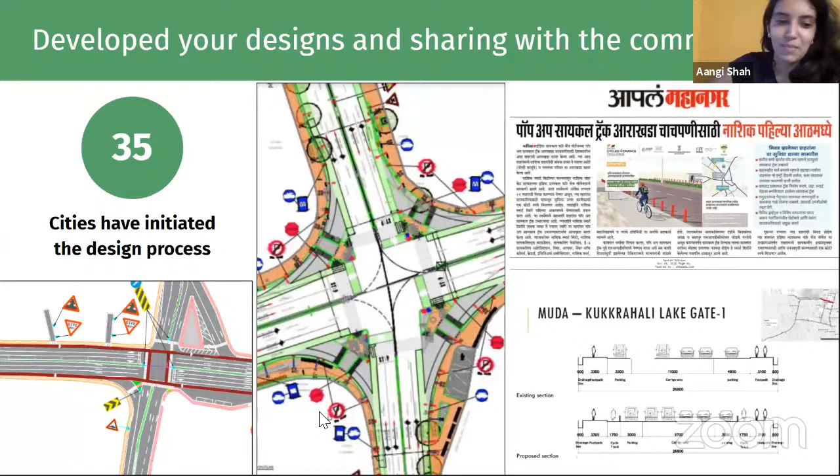As cities have also completed their handlebar surveys, they have started to develop their designs. We've seen over 35 cities have already initiated their design process. We've hosted design discussions with many of you, and we love the rigor with which you are taking these designs forward and testing them on the ground. 15 cities have started the exciting process of testing these designs on the ground. Here we're seeing Pimpri Chinchwad, Aurangabad, photographs from Nashik, Chandigarh, and you're also including a lot of citizen engagement initiatives to get feedback on how users are using these designs. Kudos to all of these cities for doing such a fantastic job.

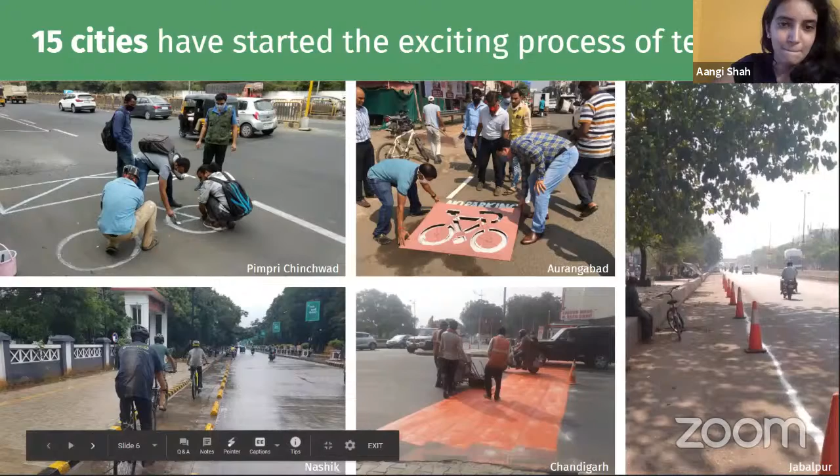And of course, cities have also continued to build momentum through cycle rallies, cyclothons, like you're seeing in the photographs on this slide, and cycle maintenance workshops, and also online workshops and webinars and much more.

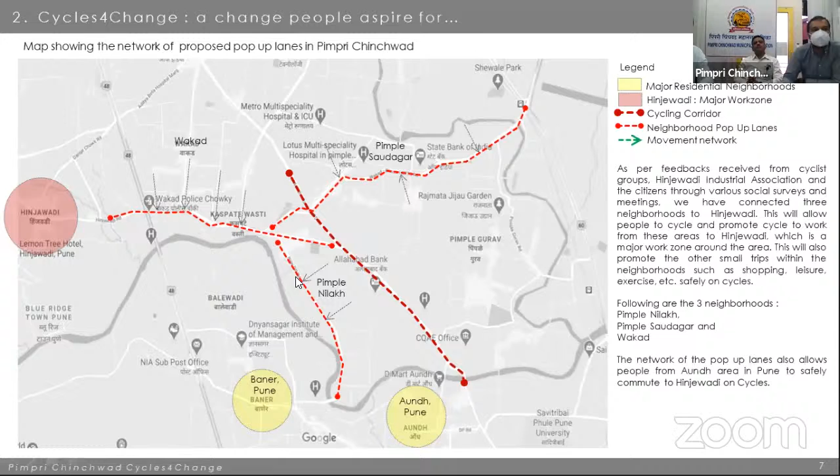For the neighborhood streets, we had discussions with a lot of stakeholders in the city. Based on these discussions, 3 roads were identified as neighborhood streets, covering 3 major important areas of the city: Pimple Saudagar, Pimple Nilakh, and Wakad.

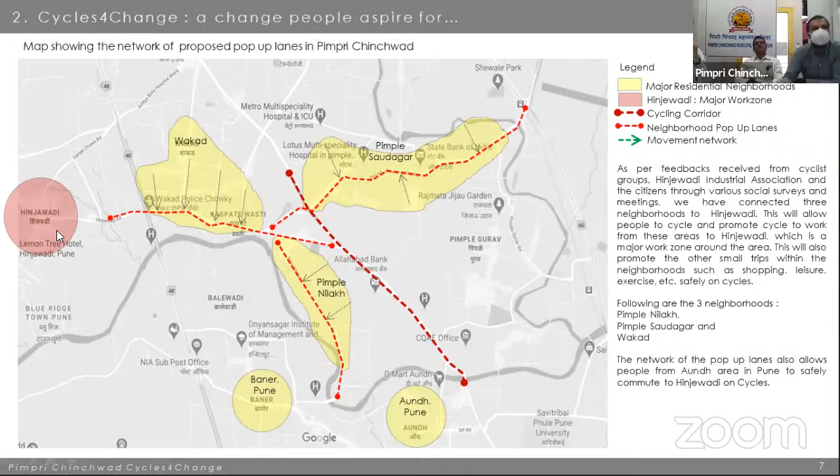The idea of selecting these streets as neighborhood streets and this particular corridor was to connect all these residential areas around Baner in Pune, Pimple Nilakh, Pimple Saudagar, and Wakad to a major industrial area and IT hub of the city, which is Hinjewadi.

So these are the different streets. This is the main pilot corridor, and these are the 3 neighborhood streets. The cumulative length of all these streets is around 17 kilometers, and with cycle tracks on both sides, including pop-up lanes, the total length of the bicycle tracks will be around 34 kilometers. We came up with different strategies for different roads, like painted plus segregated, or just painted where the road width is limited.

We also conducted a handlebar survey. 25 people participated, divided into 5 groups of 5 persons each, and they took rides on 5 different stretches of the city. We came up with different pain points for those streets and categorized the issues into 4 categories.

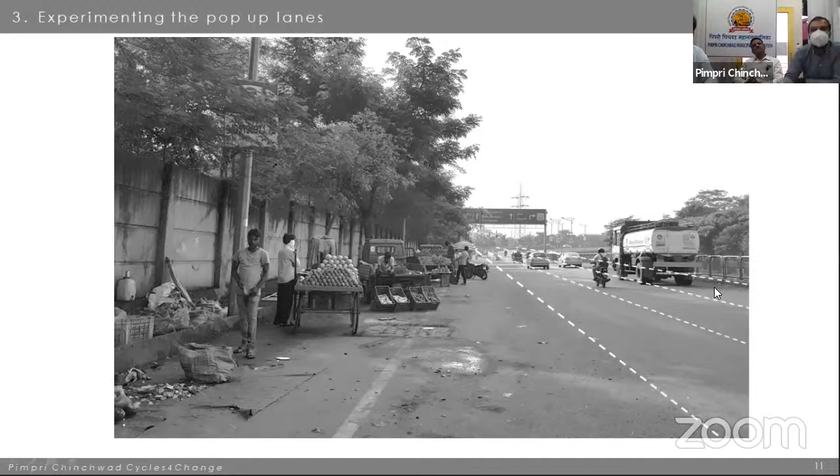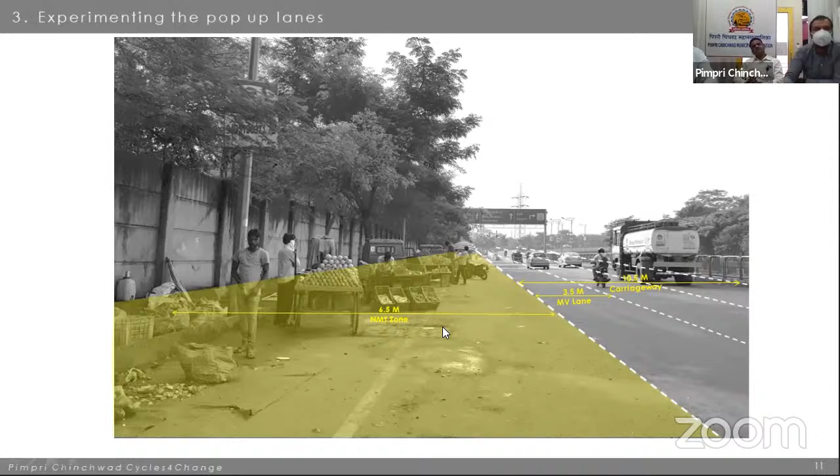After that, we had 3 lanes of carriageway or motor vehicle lanes, and the remaining width, which fluctuates between 2 to 6.5 meters, we called the NMT zone. We were very skeptical, so we did not call it a cycle zone or pedestrian zone, just the NMT zone. There were a few activities in the NMT zone that needed to be taken care of, and these were the drawings we produced.

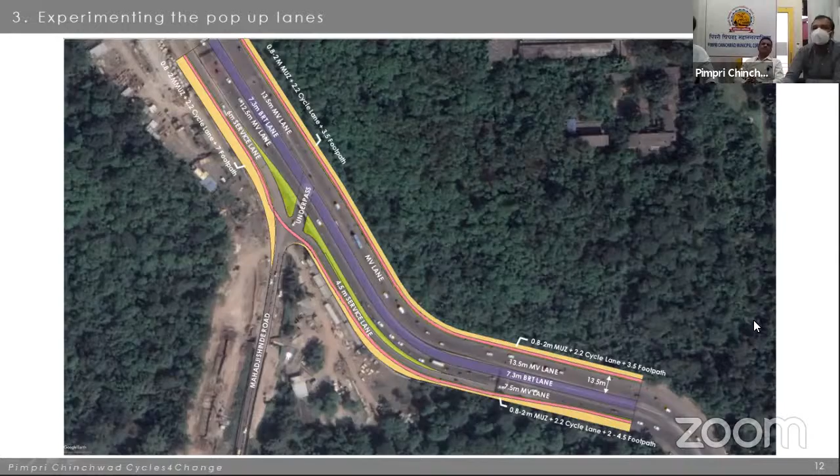Everywhere, we segregated the NMT zone into 3 parts: the multi-utility zone, ranging between 0.8 to 2 meters; the cycle lane, a pop-up cycle lane, around 2.2 meters; and a footpath varying between 2 to 4.5 meters. That was the basic strategy, and we came up with these drawings.

The basic items we considered for this intervention of pop-up lanes were traffic cones, a few planters, and cycle parking wherever required. Along with that, we also had other BOQ items like thermoplastic paint and cat's eye reflectors to ensure the safety of the cyclist.

After that, we came up with 3 zones: the multi-utility zone, which could cater to activities happening on the streets, like street vendors, and seating space if required in the future. So you actually plan everything beforehand, that was the strategy.

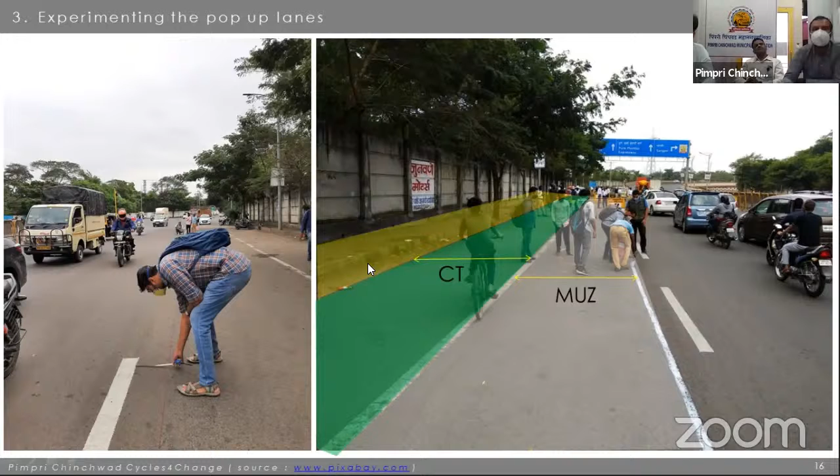Then the cycle track, a clear cycle track around 2.2 meters, and the pedestrian footpath, wide enough so people can comfortably and safely walk. After that, the width of the NMT zone kept fluctuating, and a lot of people started calling us asking why the width was fluctuating.

So this is just to demonstrate a small stretch. The entire stretch of road was around 4 kilometers, and including NMT zones on both sides, it was 8 kilometers. So we selected a 2-kilometer patch on that road and started defining these three zones within the NMT zone: the multi-utility zone, the cycle lanes, and the pedestrian lanes. Irfan, my colleague, will continue now.

Hello everybody, this is Irfan from New Era Infotech. We got associated with PCMC to promote cycling. The project we came up with PCMC is Go Green Go Cycling, an ecosystem to cultivate cycling culture across cities, keeping cyclists at the core.

What we realized initially when working with the corporation was that people weren't really comfortable taking up cycling. So we thought of taking a survey. We took a survey individually from our end of around 1,800 people, and this is how we came up with some points.

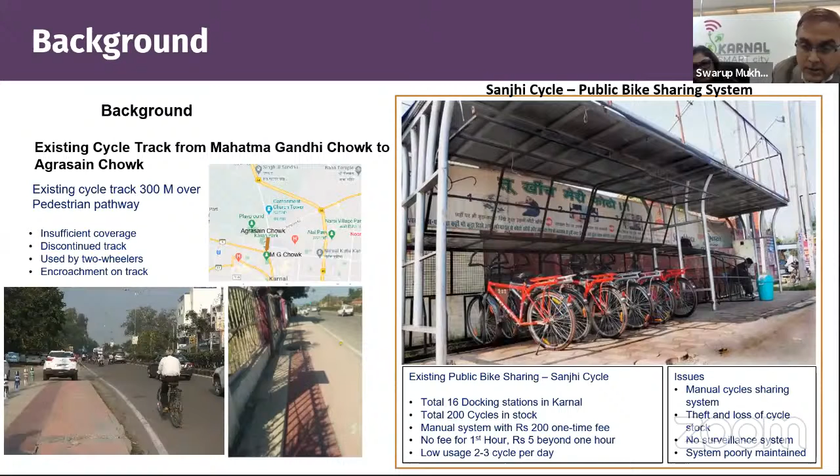After judging all the enthusiasm of the people and the supportive administration of Karnal, we managed to initiate another fresh trial on a major road called the Baldi Road from Agrasain Chowk to Gitadwar. It's a stretch of around 2 kilometers, a well-done, recently developed 6-lane divided highway with a 2-meter paved shoulder on both sides.

It's not us only, with the contribution from the social civic societies and associations, the Municipal Corporation of Karnal, district administration, and most importantly the Karnal Randonneurs and the Royal Cycling Club of Karnal - their representatives all together made a representation to our administration. With the help of our DC sir and the Superintendent of Police of Karnal, we successfully closed down this major road because the traffic volume is not as high as it has to be for a 6-lane road.

Inside the city, it's around 22,000 PCU per day annual average daily traffic, which is very low for a 6-lane road. So what we did is close one side of the road during two time windows: in the morning from 5:30 to 7:30, and in the evening from 5:30 to 7:30. People are spontaneously using this road still today for cycling and walking purposes.

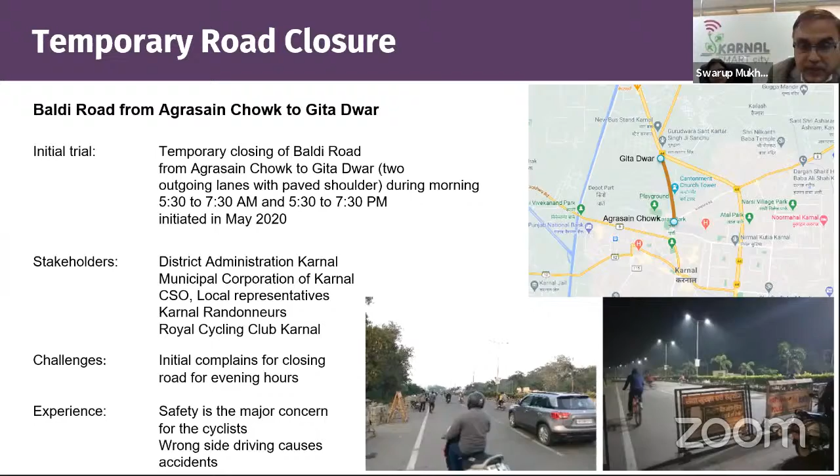So these are the major points, the major issues that we faced with the discussion with the end users. This is the picture of the stretch that I'm talking about - a 2-kilometer stretch.

It shows here there is a temporary barricade put at the entry of this road. However, the other side of the road, which is 3-lane plus paved shoulder, effectively has 4 lanes on the other side, so police used to control the traffic, both two-way traffic, on the other side of the road. The traffic movement is still there, but today at 7 o'clock, this is the scene there.

Most of the people, young people, are using this as a cycle lane, and old age people are using it as a walking area. The major point here is, again, they are very happy because it's safe. There is no traffic, no other disturbance.

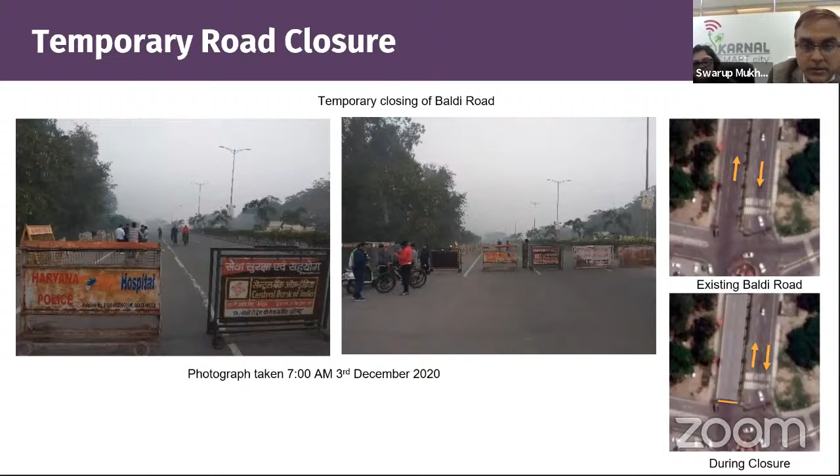So getting a cue from this trial that we have done here, we formulated a project on this same road, Baldi Bypass, 2 kilometers. It is a combination of a cultural street along with a cycle track.

Right now, if you see the lower bottom left picture, that is the existing site - the footpath and a paved shoulder here. What we proposed here, and at the end of this stretch there is Srimad Bhagavad Gita Dwar, which connects the theme of Karnal with Kurukshetra and the basic idea of the land of Karan - those things are a kind of theme for that road. So it's already there, and we created a cultural corridor here.

What we did exactly is fencing the wall - the existing wall is like a barbed fence there. The other side of the road is forest land, so we cannot construct anything there. So we are redoing the barbed wire into a chain link fencing, and with this chain link fencing, we will be having a green cover with creeper plantation there.

And in 6 or 7, 8 locations, we'll have a plain wall for around 20-meter long, where we will use the surface for a thematic drawing based on Karnal, based on Mahabharata, Karan, those things. And at the same time, we'll use the paved shoulder part as a cycle track, which is an NMT lane. We can call it NMT lane.

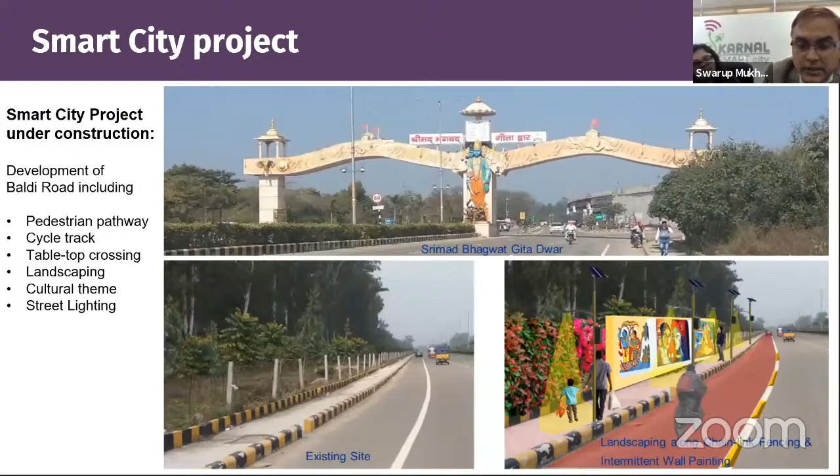Yeah, sure. In the same way, we also had a detailed survey of the entire city, all the roads, what are the traffic levels, and also the number of cycles moving. Here, there are 2 types of cyclists: we have recreational cyclists who are going for fitness and all, and the other one is cyclists who are going from home to work. If you consider their numbers, they are significant, 2,000 to 2,500 cycles are there in the major streets that we found out throughout the city.

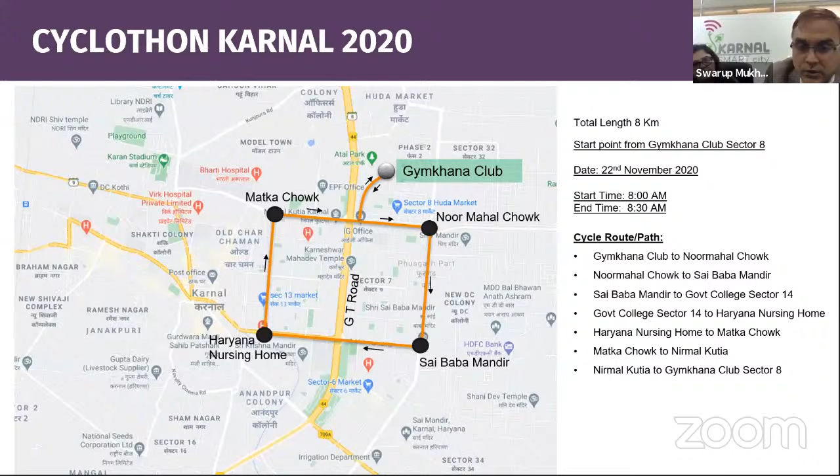Then from that, with the help of local consultation, the area we cover is mostly residential. We are touching the colleges, the student community, we're touching the schools and offices, office complexes. Then we formulated this square network, which is covering both parts of the city, both sides of National Highway 44. In line with that, we also conducted Cyclothon 2020 through this same route, where we are proposing a cycle track in coming days.

We are going to propose that cycle track there also, using the paved shoulder area, the same way that we have done in Baldi bypass. This is a picture of the cyclothon that we recently conducted in the month of November. It was attended by more than 250 people of all different age groups, from the student community, from coaching, and professional cyclists staying here in Karnal. So we had a very good response from the people.

We are hoping that we will be able to manage to actually implement around a total of 15 kilometers of cycle track in the city. Thank you very much.

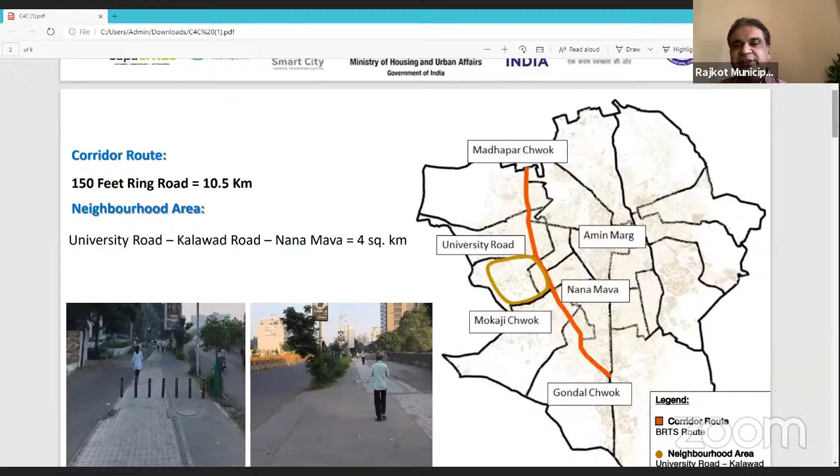We made an investment in a cycle track way back in 2012, a 10.5 into 2 kilometer stretch. But somehow the cycle track was never used. In fact, the BRTS corridor was much more successful with very high ridership. We also had very good transit-oriented development along the BRTS track, but the cycle track never developed.

We even tried to do a couple of cyclothon events, and each event had participation of more than 2,000 people for 4 to 5 years. But still, that did not make cyclists use this infrastructure.

We again started a very rudimentary cycle sharing project way back in 2015. It was a very modest in-house app with a few bicycles. People were using those bicycles, but only for hygiene, meaning health, not for commuting to work.

So probably this whole infrastructure was waiting for some catalyst, and probably Cycles4Change again gave us that opportunity to rejuvenate the investment.

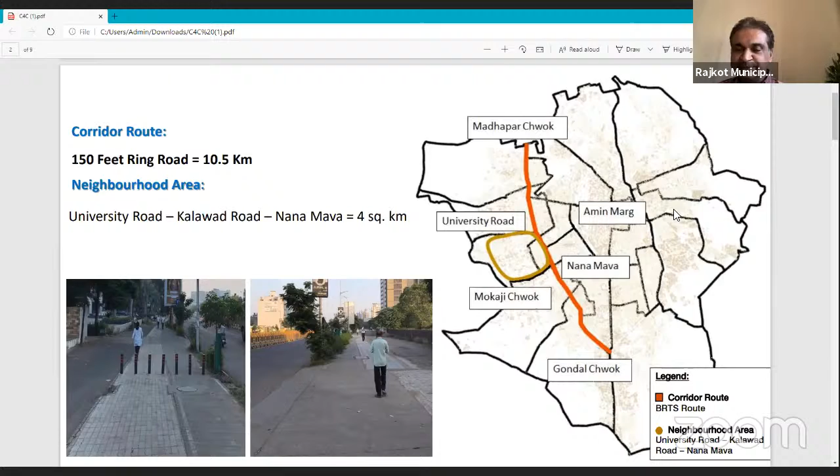So this is the corridor. We had a handlebar survey. I'll keep it very brief - all cities have done it, we know it well.

Just to add enthusiasm to the cyclists, the commissioner, myself, the CEO, and other deputy commissioners all joined the handlebar surveys, not once but many times, and we identified issues which are very well known throughout the country: encroachments, low visibility, poor lighting, crossings, cars being parked on the track - all those things. So enforcement was a major issue.

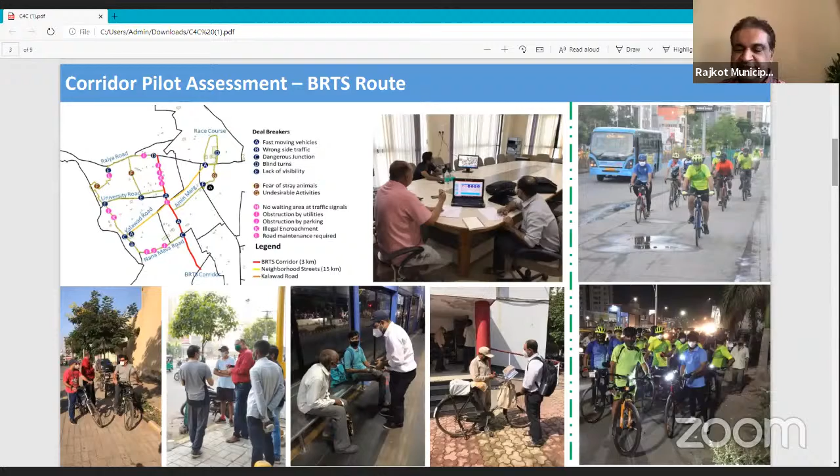Again, this is a bit scientific - we had a priority of actions where we identified which parts needed more stringent action, but this is just for internal purpose.

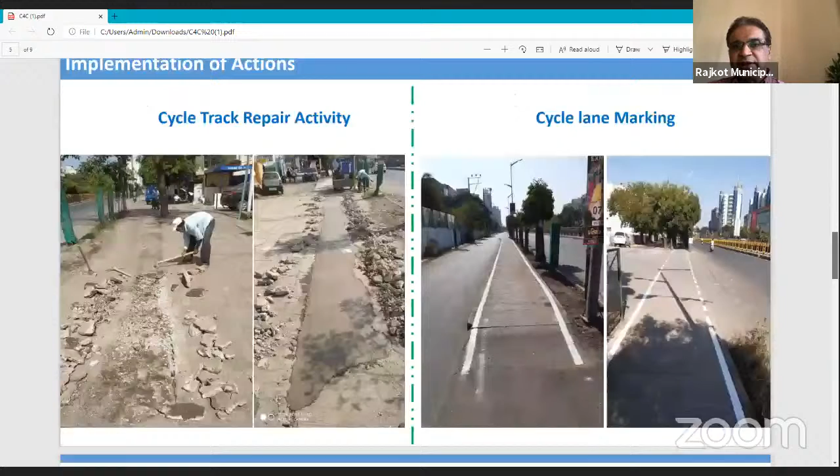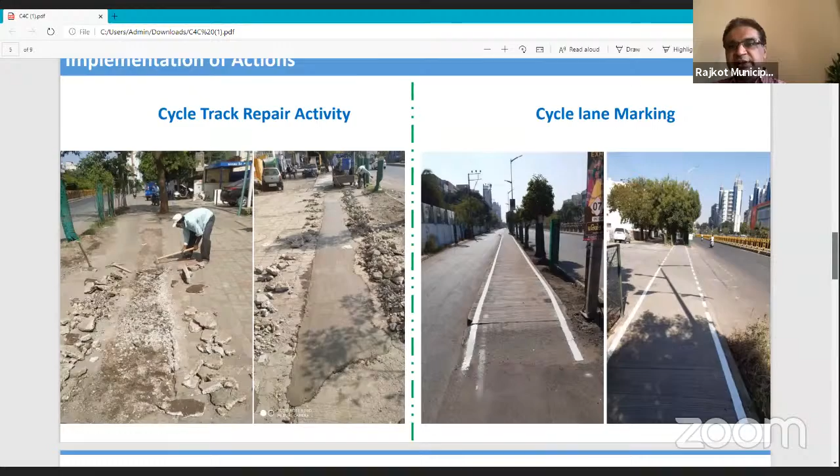Again, cycle track repair activity and cycle lane marking, we are doing just like other cities, so for the sake of brevity I'll not repeat it. Tree maintenance and unauthorized parking, again for the sake of brevity, I'll not repeat it.

What we needed was some catalyst to really increase the use of bicycles in the city. The ownership of bicycles was rising, but they were not being used for commuting to work. So we decided that the municipal corporation will cycle to work every Friday. Since 7 weeks we have been doing this, and this will be the 8th week.

We requested all the big establishments along the proposed cycling corridor to join us for cycle to work on Friday. Apart from that, we even urged other citizens to cycle to work from wherever they are and wherever they work, every Friday.

Initially, our response was excellent. First week, second week, third week, it was great. But again, we understood that it started declining. First week, we were more than 500 riders. Then second week, it went down to say 300. Third week, it went to 100.

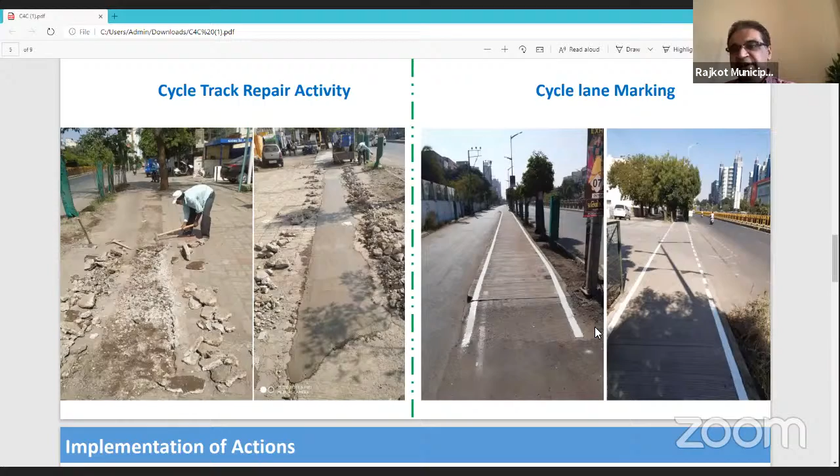Again, we found that the plantations we had made were really cutting the vision, making it very unsafe. In fact, we never realized it unless we rode ourselves. It was a very simple task to trim down the trees, but it was very important.

So cutting down the trees, ensuring there are no potholes, ensuring there are enough lights. A few of the crossings were encroached, used by vendors and tea shops, and we found women were not using them because of the vendors and crowds. So we had a very heavy dose of enforcement to ensure all those junctions and crossings were freed of encroachments, just to ensure that women riders venturing for the first time, or already using it, would find it safe and dependable.

Sure, sir, thank you so much for that. Because as much as we want to encourage cycling, it's also important to see who might not be cycling right now or might be cycling less—for example, women or children—and how we can put the spotlight on them, identify their issues, and then resolve them.

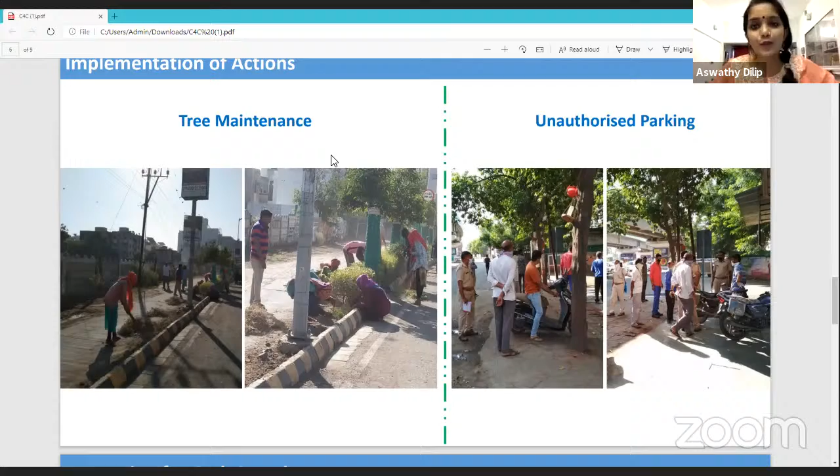Sure, thank you so much, sir. So as we come to the end of this panel discussion, I'd like to quickly share the space with our panelists about what your clear next steps are—very quickly, so it's helpful for other cities too. Can we start with team Pimpri-Chinchwad?

So basically, the next step after this pop-up lane pilot corridor is that we are going to shift to the neighborhood streets. Parallelly, we are trying to put an NMT policy in place so that everything we are doing now can sustain in the longer run.

There are also new initiatives that the municipal corporation is planning to undertake under the NMT infrastructure, so that's also there. Thank you so much, team Pimpri-Chinchwad.

Over to you, Karnal—what are your plans now? Actually, the cycle track we already started implementing, and the proposed cycle track in the city, more or less we have space there. But we also found some bottleneck areas, the pain points, as you call them.

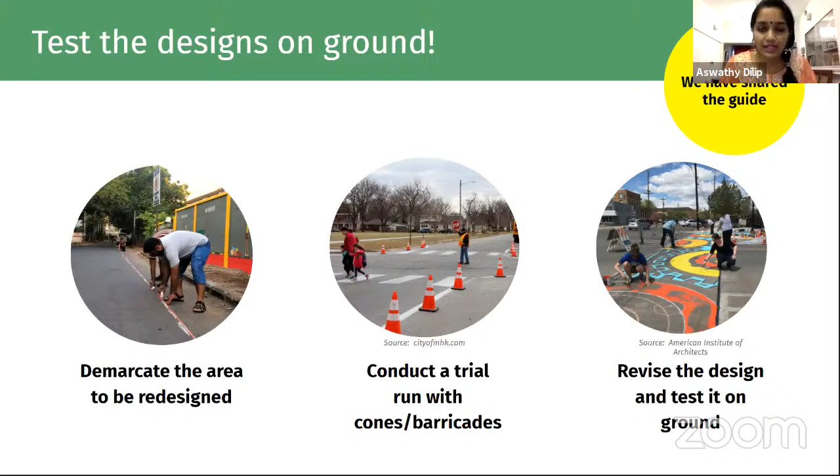As you create your pilot intervention and launch it, it's very important to build support for this particular intervention. Hence, we would request all of you to kick off this pilot through a launch event. The intention of having a launch event is to create a buzz about this new intervention, to inform your citizens, ensure participation from citizens, and document their reactions as well. This would play a very important role in ensuring the success of this intervention and for scaling it up to other parts of the city and neighborhoods.

So you could spread awareness by hosting exhibitions, cycle rallies and races, especially if you want to promote it amongst women and children, with specific activities targeting this vulnerable stakeholder group. You could host cycle repair clinics where people can bring their old cycles, repair them, and then use them on these new interventions.

You can have cycle training sessions, as well as, like we saw in the case of Rajkot, a lot of local champions—both in Rajkot and PCMC—where local champions like the municipal corporation commissioner, officials from urban local bodies, and other stores and business houses really take on cycling and promote it amongst their employees as well. Next slide.

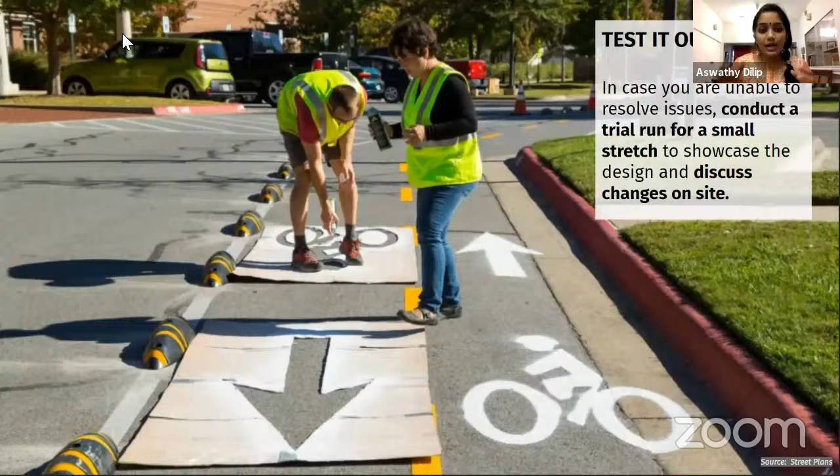Now, testing it out is extremely essential, and we would say that it has to be segregated. On the corridors in the neighborhoods, look at how you can increase their safety, etc. But it's very important to test and ensure that there's segregation. Sometimes cities say that if there are many cyclists on our corridor, we will then segregate it. However, we'd like you to keep in mind that it's not just for the existing cyclists, but also for the cyclists you want to bring on board and really want to encourage. Hence, always do segregate.

In case there are conflicts, do conduct trial runs for smaller stretches and discuss the changes on the site as well.

Through this entire process, it's very important for us to monitor and evaluate the impact of the interventions, observe and gather feedback from the users to measure the impact. We will share more details on how this can be done shortly, but this is very critical to show the impact of the current intervention, and also to build support for future projects.

In case you hear from the users, like the way PCMC had said, where users ask why the cycle lane width is increasing and decreasing, then it shows you need to have consistent width. Those sort of design changes can also be made, which is very important in the test, learn, scale approach that we are following. So thank you so much.

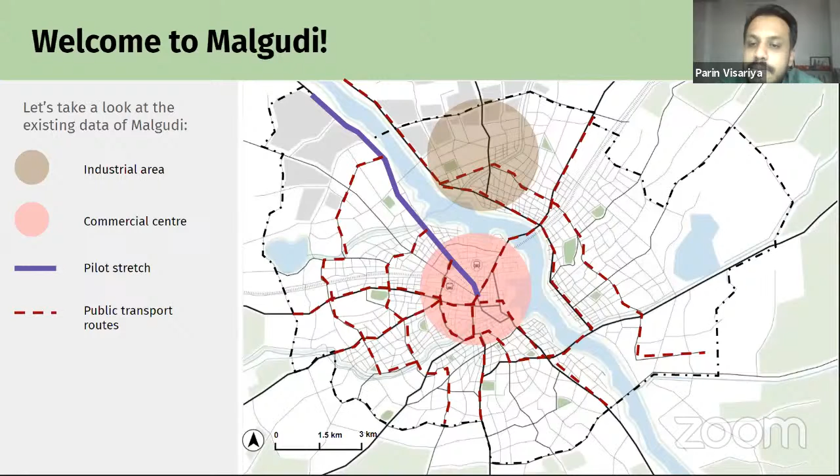Now, as part of the scale up, there are different strategies the city could adopt, and these are some suggestions. The city could do much more than that, but just to give you some examples you could think of.

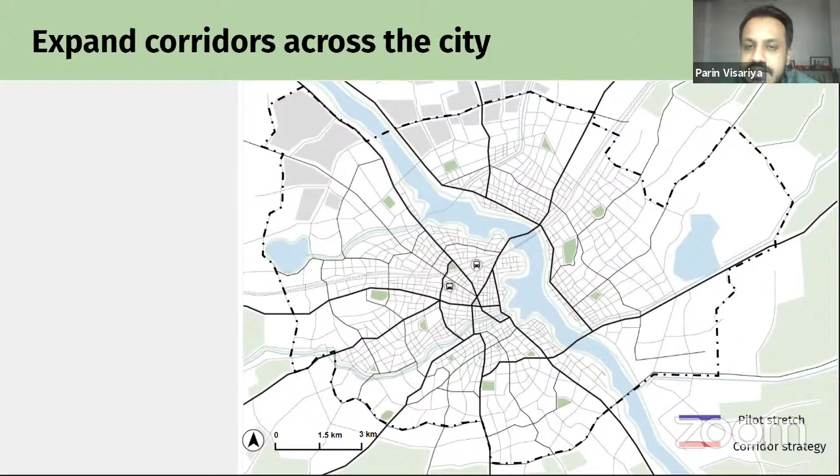One is, since many people travel from the peripheries to the city center, the city could consider work corridors that help people make their daily work trips and keep their cycle rides safe.

Second, they could consider cycling corridors along public transport routes, which can support public transport, act as last mile connectivity, and also decongest public transport, especially in pandemic times.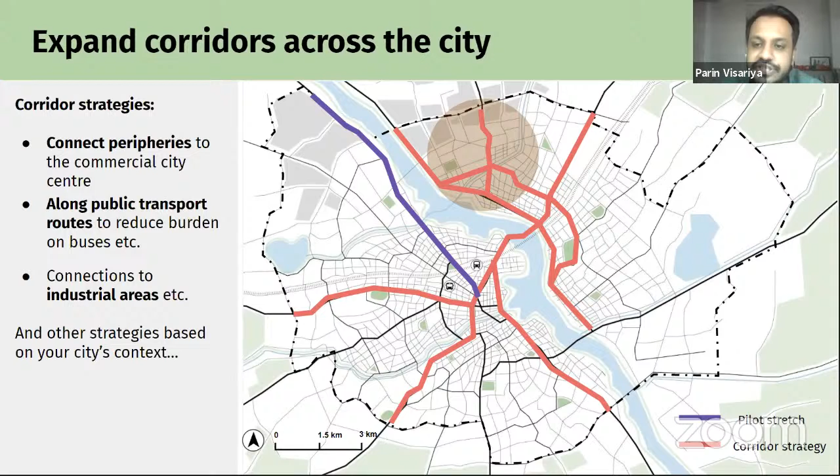Third, you could also consider connecting key landmarks in the city where people frequently travel, such as the industrial corridor, or important institutions or landmarks like bus stands or railway stations where citizens travel. Based on your context, you can think of different strategies.

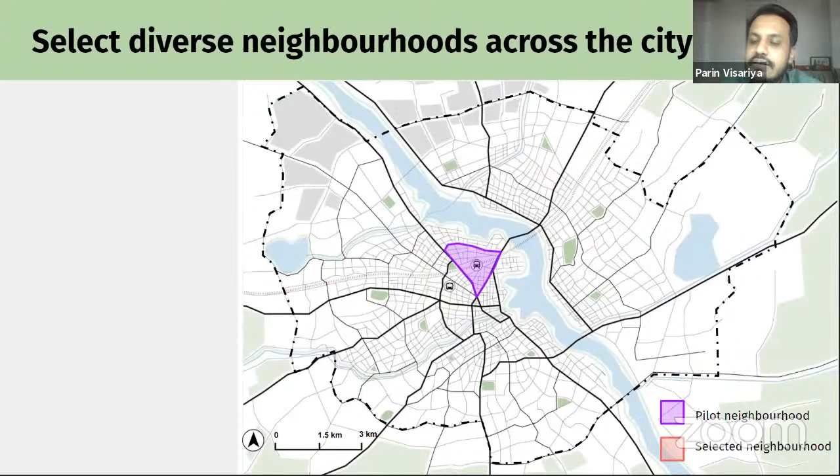Now, when it comes to selecting different neighborhoods across the city, there are different ways to select additional neighborhoods that you could make safe for cycling. You've already selected one pilot neighborhood. One way of identifying new neighborhoods is to crowdsource, rolling out an expression of interest for citizens to say which neighborhood they would like to see become safe for cycling.

The residents' welfare associations in these neighborhoods could be reached out to. The expression of interest form could be rolled out to them, and whichever neighborhood shows support, you can consider as additional new sites. We will share the expression of interest form for neighborhoods with you all.

Also, you can add another filter for selecting neighborhoods where design interventions become feasible. By feasible, I mean reached easily by different citizens, so you don't build in peripheries where people cannot reach. The interventions should be where it's feasible, highly visible, and citizens are happy to use it. Finally, the neighborhoods should also be in and around the corridors, so there is a good network between corridors and neighborhoods for seamless travel.

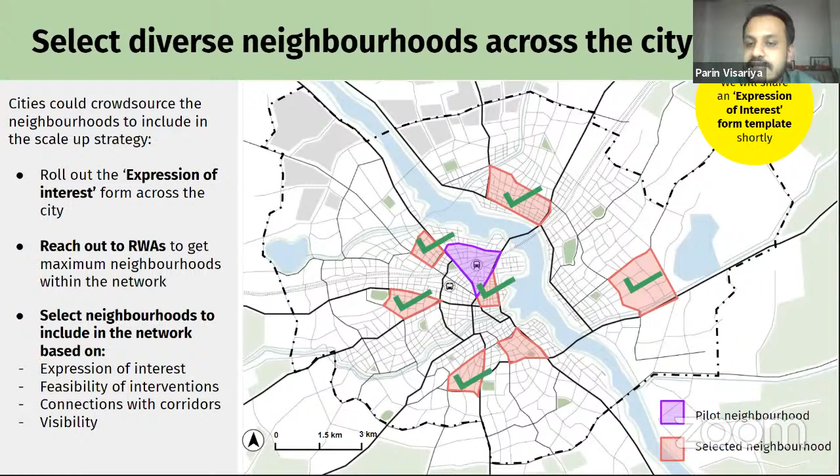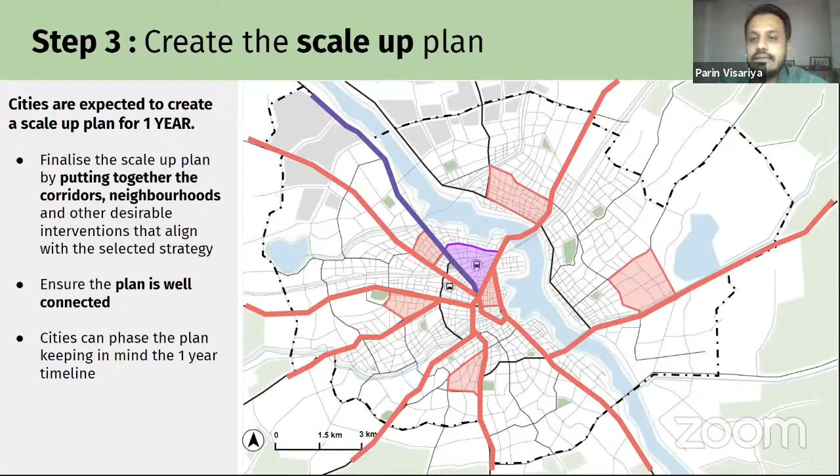As we have seen in the discussions before, managing parking is an important aspect of providing safe cycling intervention, especially when the city is providing a protected cycle lane. This has been an issue across all the cities. Hence, along with the scale-up plan, you should also prepare a parking management plan along the neighborhoods and corridors that you intend your next interventions to be in.

Very quickly, prepare a parking management plan. Clearly demarcate which are the parking spots where parking is allowed, and clearly demarcate where parking is not allowed, so all citizens are well aware of it. Where there is intense parking demand, charge for the parking so you'll be able to control it.

Also, if there are unused off-street spaces, please shift the on-street parking there. Try to speak to private owners, private malls, and commercial centers where private parking could be accommodated. You could also initiate your work on a parking management policy. This has been extensively covered in workshop 4, so the presentation for that, in detail about parking management, can also be looked at in the workshop 4 presentation.

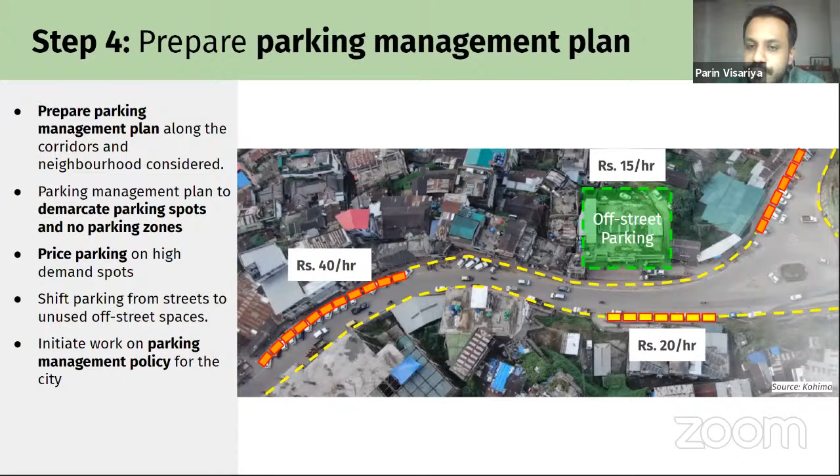As I said, the test, learn, and scale approach is the mantra that we have heard constantly in all our workshops. Hence, as you develop a scale-up plan, you can keep it flexible throughout. So in case the plan you intend to do your next set of interventions on, by any reason, you found out that the interventions are not feasible.

Or there are better sites that could benefit the citizens, please feel free to revisit your plan, and you can make necessary changes to accommodate those changes. So along with your team, you can update the plan, and you can also update the timelines for the delivery of the different interventions that you had planned.

Now we go to the next step of the cycling plan, which is very important. Once you have the draft cycling plan, it is important for you to gather feedback from different stakeholders. These stakeholders are both from government departments, that could be traffic police, representation from development authority, public works departments, and the ones whose opinion are very important to ensure this becomes a reality on ground.

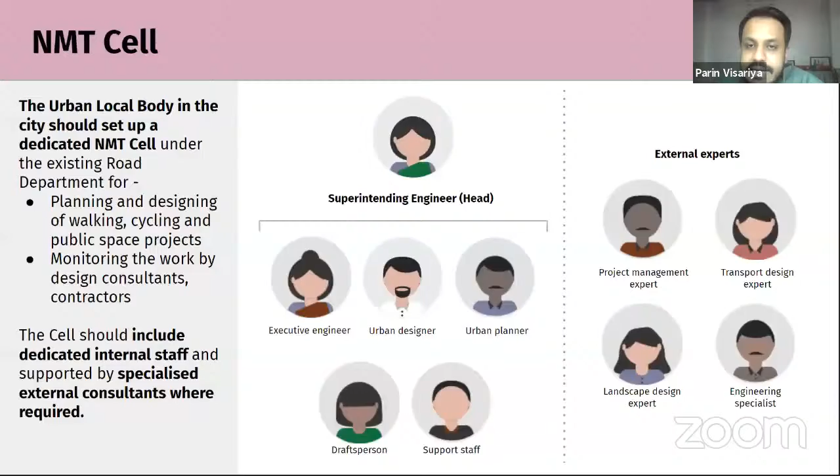Next, the steps to setting up an NMT cell. Like the Apex committee, the first step is to prepare a proposal for the NMT cell. The proposal will include the roles and responsibilities of the NMT cell, the staff it's going to require, and the budget for the staff - that's an important part of preparing such a proposal.

In stage one, we expect cities to prepare such an NMT cell proposal, which they could further send across for approval from the standing committees or general body's approval. We will share with you the NMT cell proposal note, which you can edit as per your requirement and further process for approval. That's stage two.

Getting it approved can also happen in stage 2. Third, after it's approved, you can start identifying and hiring the staff you want to be part of the cell. After that, you can have your first meeting between the NMT cell and Apex committee to discuss how they would want to carry out the walking and cycling projects in the city. Fifth, this cell could start preparing the plan of action, the various projects it wants to plan and implement.